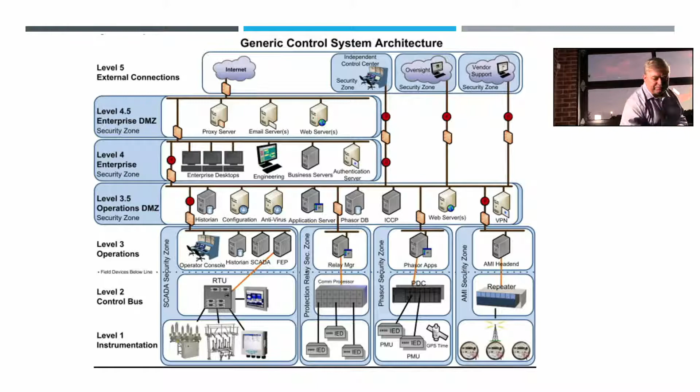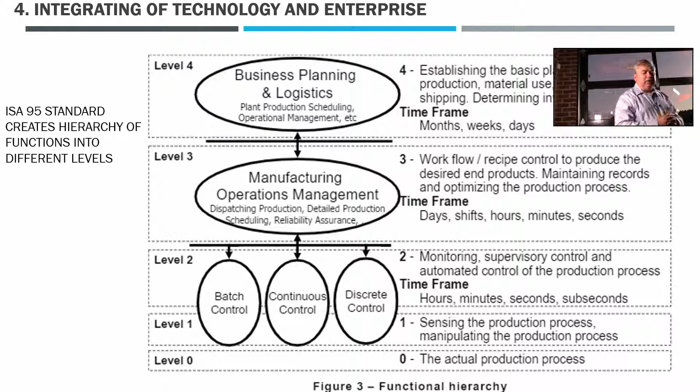As you look at those levels, you really see a change of time frame that takes place. Oftentimes what you see at levels 0, 1, and 2 happens in hours or minutes, sometimes seconds. But that now integrates with manufacturing operations management, which occurs at days, shifts, or hours, and then up to the business planning level, which could be months, weeks, or days. So although it's continuous time and driven by time, not everything is real-time fast data, but time stamping and the incorporation of time is an increasingly integrated part of those solutions.

In the past, we may have seen data only occurring in the production control area. Now that's getting into the scheduling of machines, material and energy control, maintenance management, and quality assurance. All these functions of the business are increasingly integrated together, and there's an engineering role in many of those. So that's more of a systems thinking impact now—it's not just one thing by itself, it's how you get that machine to fit in with your overall production strategies.

I guess I don't have to tell anyone with a new car that there are more sensors and more features there than you've ever seen. As cars become more intelligent, there's more use of radar and infrared to see how close you are to the car in front of you. You're trying to decrease response time, increase safety, and there's just a tremendous number of sensors now that are part of any vehicle.

You've probably heard that Ford has been affected now with some of its delivery because of the availability of some of the chips and electronics it needs to produce the cars.

You can also see GPS built in, but another big area of IoT has been asset tracking, where you can see where those vehicles are if you have an entire fleet. There have been cases where people have done aftermarket IoT solutions, and sometimes they're built in. I think it was Caterpillar that built an app into the logic of one of their construction machines, requiring you to check the oil before the vehicle could be started. So they're moving now to try to protect that machine by requiring a certain user experience around maintaining those machines. I think that's interesting—it's such a large ticket item, but there are just so many sensors there.

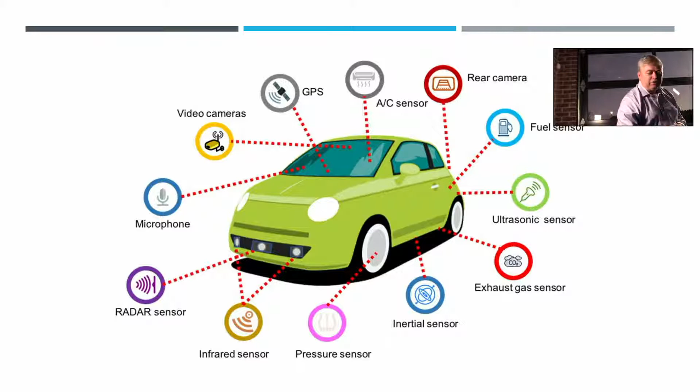The other thing, as you look at self-driving cars, is it's not only within the car itself, but now people are saying, how can that car connect with other cars? So you want vehicle-to-vehicle communication, vehicle to network communication, vehicle to infrastructure like traffic lights, vehicle to the cloud, or vehicle even to home if you want to open your garage door. So there's a whole level of V2X communication now. It's not high speed, but it's increasingly about not only dealing with the car, but the highway, the roadways, all of that interacting together with increased precision.

There is some good research on that being done over at Kennesaw State with Dr. Billy Kihei, if you guys know him. There's also T-Mobile with some of their 5G work over at Curiosity Labs in Peachtree Corners—they have a test track for autonomous vehicles as well.

So again, this is not just data. A lot of this is systems thinking, and it's really going to take engineers to understand how to put together these complicated systems.

This is one people argue whether this is IoT or not. You probably know there are a lot of steam turbines. Traditional steam turbines will run forever, for days and days and days, and in some cases even a year or two without shutting down. It's needed to have very high reliability, so increasingly there's always been some case of vibration instrumentation and supervisory instrumentation on those.

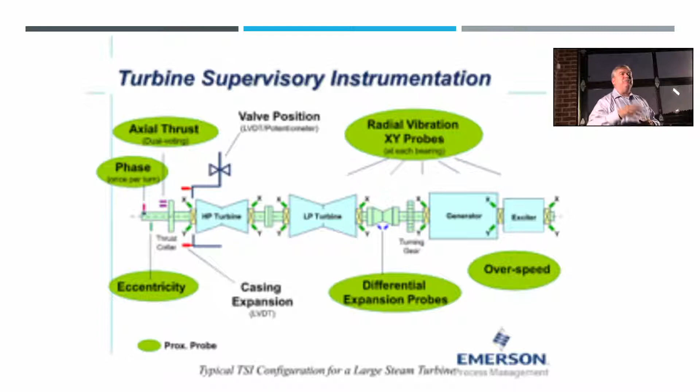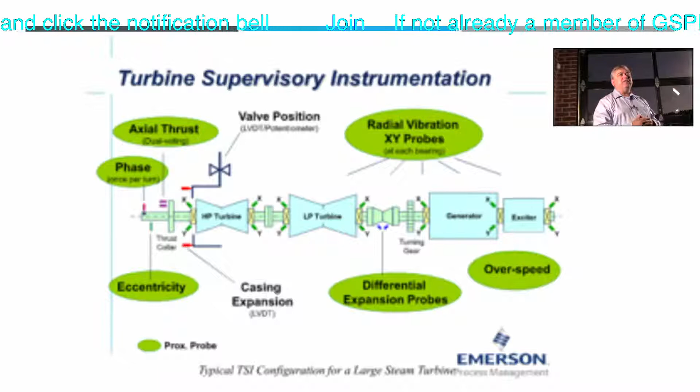As you may or may not know, vibration is not a perfect science. Sometimes you're looking more at relative changes in vibration than absolute changes. But it is a good way when you increasingly look at 10, 20, or 100 machines - you can normalize that and get a lot better information about how those machines are running. Again, that all takes engineering to understand those machines and sensors.

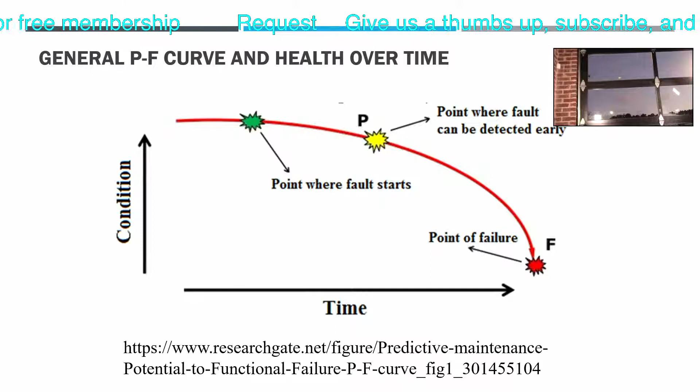There's also a case where the cost of failure, the cost of downtime on machines, is increasingly a critical issue. You may know the PF curve if you're familiar with predictive maintenance concepts - there's a point where a fault occurs, a point where you can detect that fault, and then a point where it's going to fail. So the idea is if you can detect it early, before the point of failure, then you can make an intervention, get involved, and take some corrective action.

So there's a lot of effort to try to do predictive anticipation on things failing, and that requires increasingly engineering efforts as well - it's not just the math. You have to understand the nature of those machines and the nature of failure, and understand what's driving that.

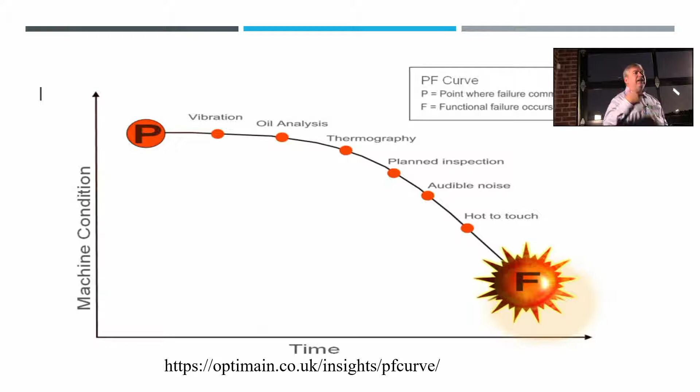One thing they found is that often you can use vibration as an early indicator, but you can also use oil analysis, thermography, planned inspection. Some people have even used ultrasonics, audible sound, or surface temperatures to try to find a more optimal case of when those things are failing. Again, this is not something that happens by itself - it will be unique to those machines, but it is a tool that will provide a lot of value, and it will be something engineers will need to be doing.

I didn't have a chance to show all of this, but I did do a project at Siemens where we tried to do some autonomous combustion tuning. If you know much about the combustion process and emissions, you're in a catch-22: if you go too low, your CO will be low but your NOx will be high. If you go too much later in the process, you'll get your NOx down but your CO will be high. So the ideal thing in combustion tuning is to try to tune it so you're in the middle, where you can optimize the actual emissions.

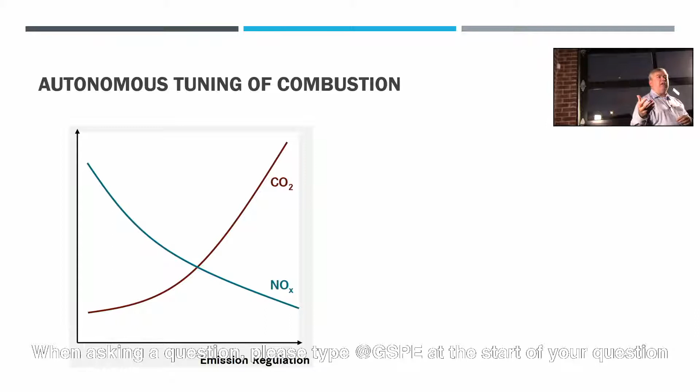Unfortunately, that's not only an element of fuel quality, it's also driven by ambient conditions. What you see right now is a lot of manual tuning - maybe 2 or 3 times a year someone goes in and tries to tune that engine to be as efficient and emission-free as possible. So there are some efforts now to try to optimize that and make some of those changes autonomously using mathematical models, some neural networks. Everyone wants to reduce emissions, but it's going to be a lot harder work than some people realize to actually get to that optimal point.

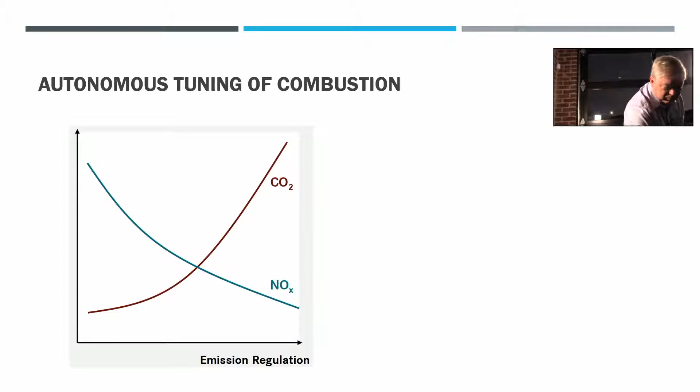This is another instance where we had a project with a power plant. As you may know, there's a combined cycle scheme, an engineered design where you have combustion turbines where the firing temperature is around 2,300 degrees, so that air is hot enough to spin a gas turbine. You can also recycle that with heat recovery and drive a steam turbine.

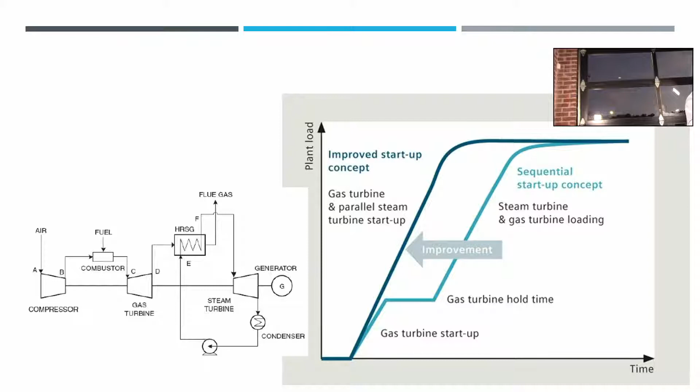What you typically find is the normal process is you start up the gas turbine, hold it for some time until things are warmed up, and then start up the steam turbine to get the load. Now, increasingly, as they do models and understand that more optimally, they're able to find improvements that make those closer to a parallel startup.

So we did a project on a 2-on-1 with Siemens, where we were able to pay for the system in about 10 months' time because of the fuel savings. Using that mathematics, using what you know about the engineering of those processes, being able to have that fuel savings not only helps you reduce costs, but also helps you get to full load faster, which helps with your market conditions of creating power.

So that's another example where it's not going to be just the math by itself. It's not just going to be the data. It's going to be taking that, doing analysis, and understanding those machines enough to drive that.

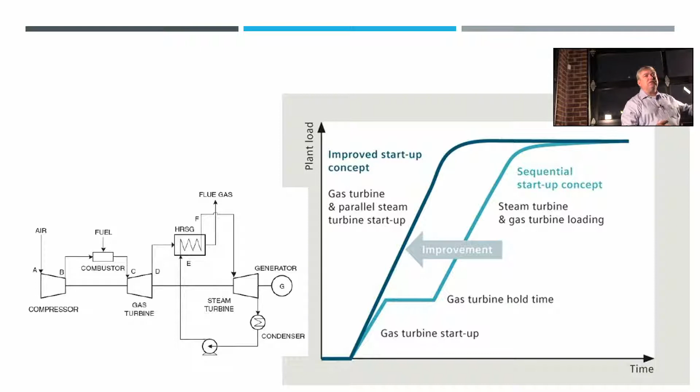For example, in a pipeline, you need to keep track of a lot of those characteristics of the pipelines you put in: where they were put in, the size, the thickness, the type of material. Increasingly, you can do inspections where you analyze performance by sending pigs or instrumentation through those to assess that, and now you can have higher accuracy of knowing how the pipe was made than was known at the time the pipe was originally made.

But now they plug that into risk models where they're able to say, based on this condition of the pipe, what is the likelihood of corrosion, what is the likelihood of other threats, and then you can evaluate your renew, replace, or retire strategies, not just based on the inspection, but based on some risk models you now have of those pipelines. Increasingly, this is going to happen with more and more products.

Rather than just seeing the engineered product after it ships, now there'll be people who have opportunities to continue to service that equipment, and they'll need to know even more about that equipment than maybe was needed at the time to manufacture it.

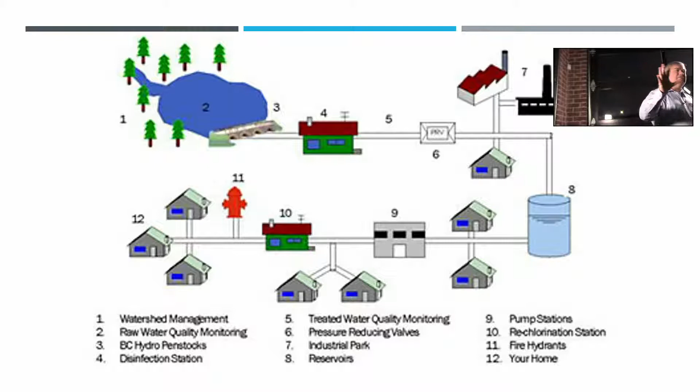Another example - how are we doing for time? Is this good? Is this interesting? Do you guys have any comments or thoughts?

This is another example - again, I'm trying to keep it somewhat generic - but there is a county in the Atlanta area that has put in a large-scale water monitoring system, where they're able to monitor their water use, both at the consumption side as well as from the lake all the way in, so now they can better plan their watershed use.

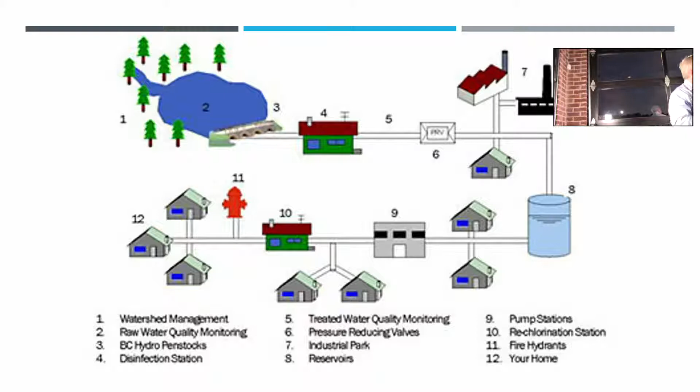What you're finding now is that they have a larger network, probably 300,000 sensors connected together as part of an overall network. That means when you have water coming to a storage facility or reservoir, you now know how much is coming because you've measured some things along the way. In other cases you know what the demand has been, so you can see where that is and anticipate ahead of time.

What people find that helps them do is avoid some overflow situations because they have more time now to act than they would have had before. The scale of that is something that would have been hard to process in the past, but now with open SCADA technologies and other historians dumping data into the cloud, they can get even ahead of some of those actions.

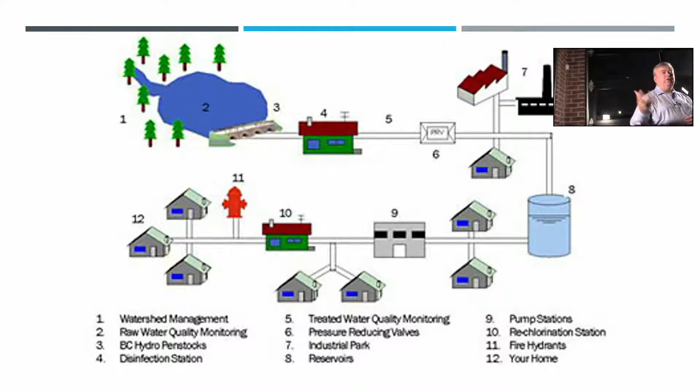They can also look for cases where there are leaks or other problems, which helps improve operations at the micro level. There's also a higher expectation now of water quality. You can't just tell someone to boil the water for the next three days anymore; people increasingly find that unacceptable. So it's valuable to improve that quality and performance.

There's also a revolution now in the exchange of engineering data with building information modeling. You're looking at the entire life cycle, from conceptual design to detailed design. You can analyze how different things work together, document that for fabrication or construction, and use 4D or 5D models as you build. It's a much more data-intensive, integrated exercise than before.

What's also interesting is how this now affects not just logistics, but the operation and maintenance of the building. Because you have that data at hand, you can maintain and operate those buildings a lot more safely than in the past.

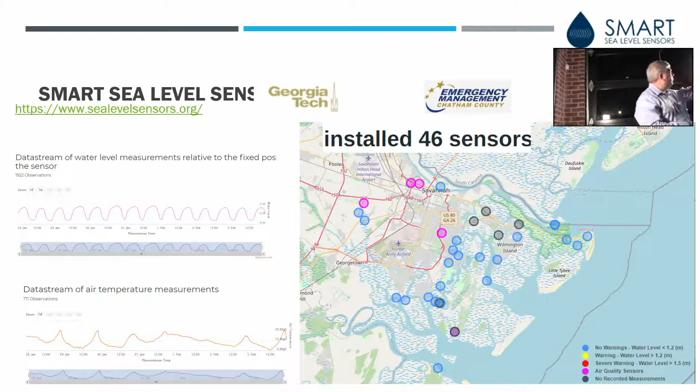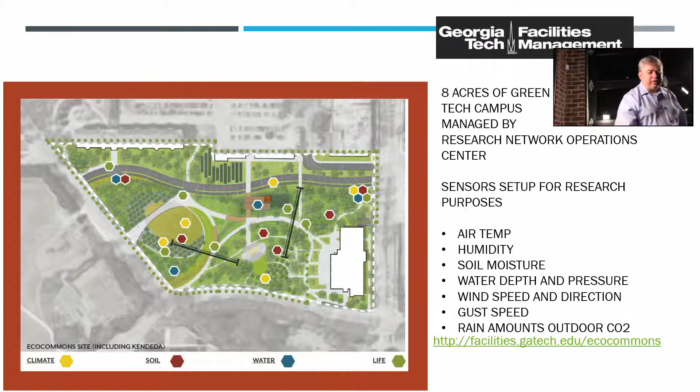One of the interesting things with sensors is how they're increasingly multi-sensors. It's not just a single variable, but you're seeing lots of variables together.

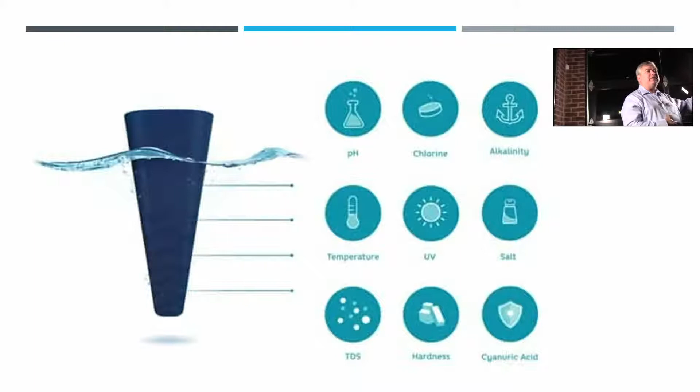Here's a case where someone created a sensor for your swimming pool. You can throw this item in your pool, and with an app, you can communicate with it and find the pH, chlorine, alkalinity, temperature, UV, TDS hardness, and some measure of cyanuric acid in the water. So now you get not only the physical characteristics, but also some of the chemical characteristics of the water.

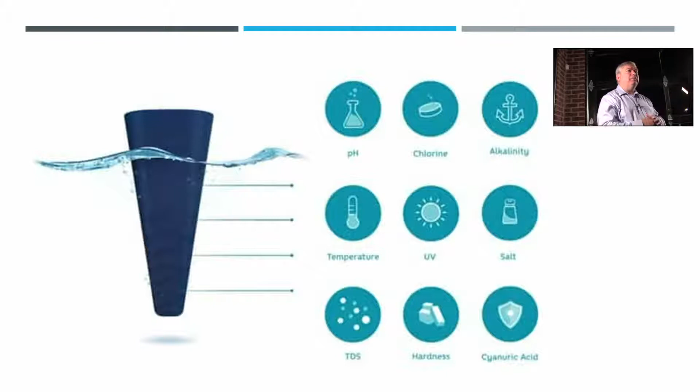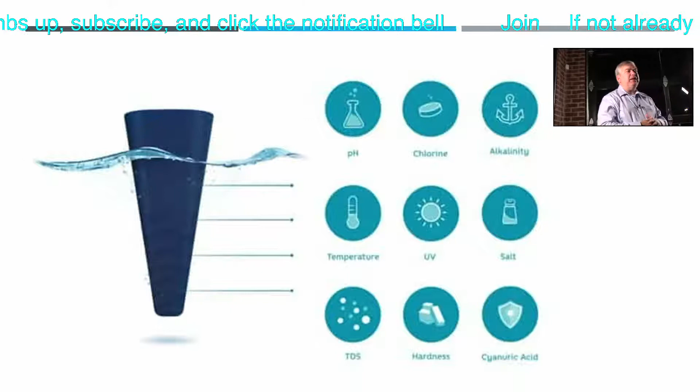So how does that help? Well, it helps you know if there have been accidents in the pool. You're not just waiting a certain amount of time until you're able to clear the pool and reopen—now you've got actual data you can use to look at that in a more detailed way. You can monitor the process. If you're putting in too much chlorine and not maintaining the pH balance, now there are a lot more intelligent ways to do that.

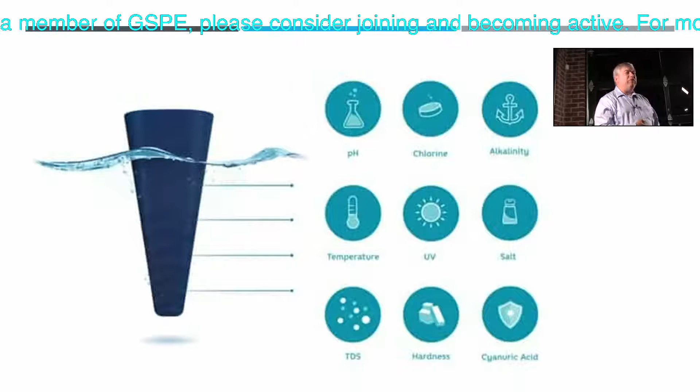So maybe you're reducing chemical use, maybe you're helping those affected by too much chlorine in the water. These kinds of things you can do at a consumer level, you can also do in chemical processes, and there are opportunities with increased instrumentation to make a better process.

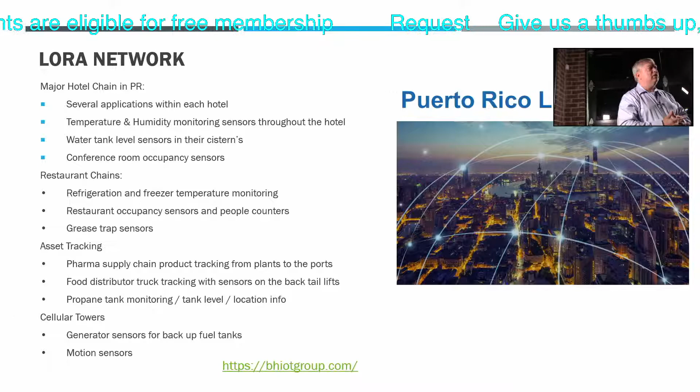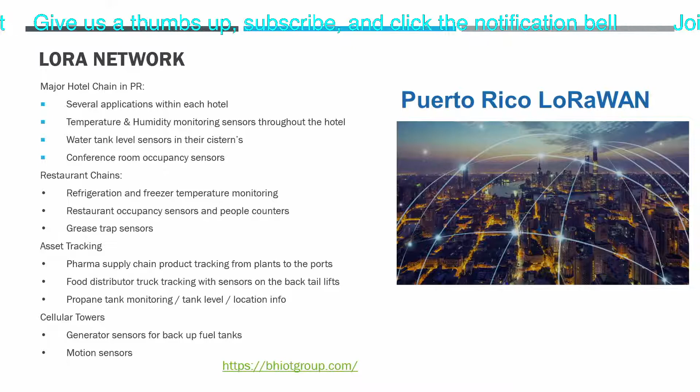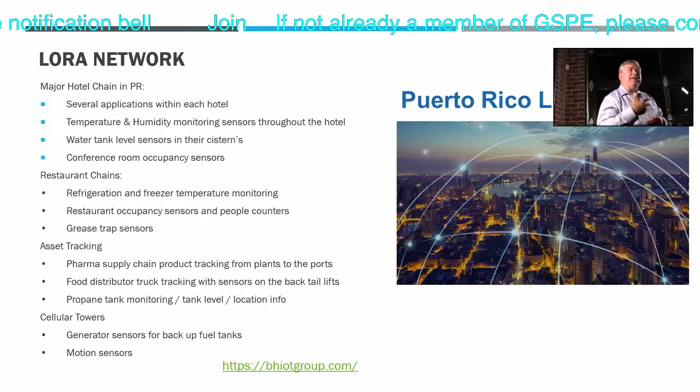The last one I'll go over: Puerto Rico was recently hit by storms, which caused a lot of disruption to their power grid and communications. They've now gone with a company that put in a low-powered, long-range, wide area network connecting lots of different points together—battery-powered sensors at hotels, restaurants, and some cell towers. Now you can communicate and get their status in an integrated way across the island without the overhead needed to keep that powered.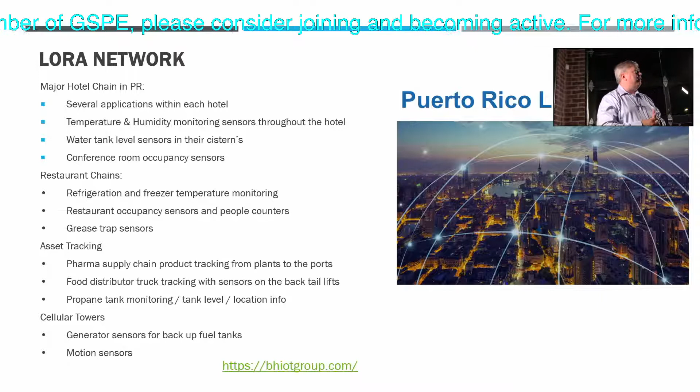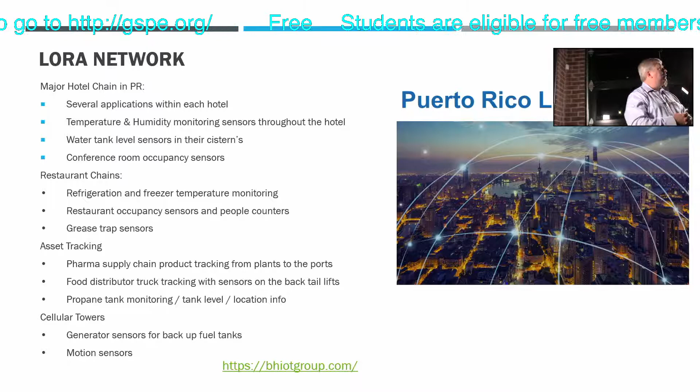There's a company here locally that's been an advisor in helping this. Especially in the developing world where they don't have the money to put in a huge wired or cell tower network, this is really a way to get more data together than they would have had otherwise.

So again, hopefully this framework helps as you look at these things: instrumentation, infrastructure, integration, intelligence, and interfaces. You can see there are opportunities for engineers throughout those processes. We could talk more about this if you want, on what you need for people on your team, or how you could do a project.

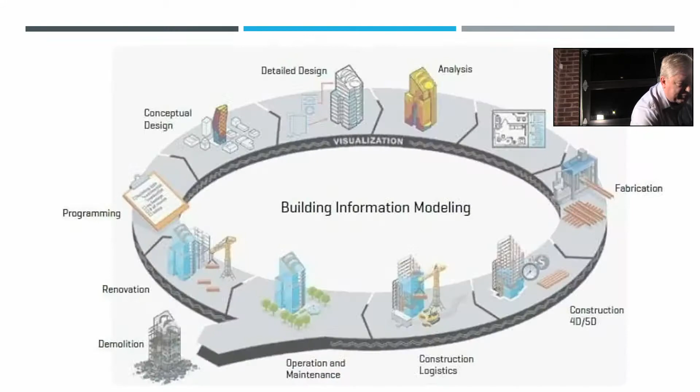I'll just get to that real quick. It's John A. Whitten on LinkedIn, and I'll be glad to connect with you guys and help. Hopefully this was interesting to you and makes you think again about how engineers can help and participate in these emerging technologies.